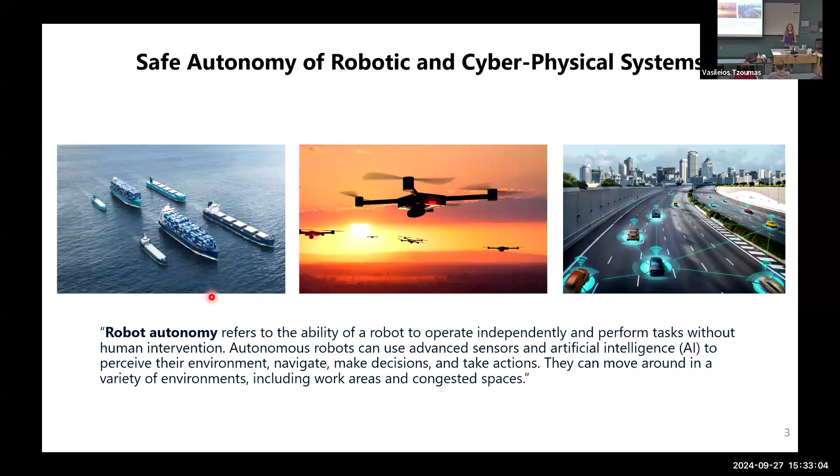Our work aims to enable autonomy for robotic and cyber-physical systems. That means we would like autonomous agents like robots to operate independently in their environment, make autonomous decisions, and act and interact with their environment without the supervision or intervention of humans.

We would particularly like to do that in challenging environments—environments that are uncertain or unknown, like when we use robots to explore other planets, environments that are dynamic and dangerous, areas we would not like humans to go close to, or environments that are congested in urban and suburban areas.

So in order to enable this vision, I would like to argue that this autonomy architecture is in fact a feedback loop—a very big feedback loop. And why am I saying that? Consider that you have your robot, typically the plant that we think about in controls, and this robot is operating in an environment.

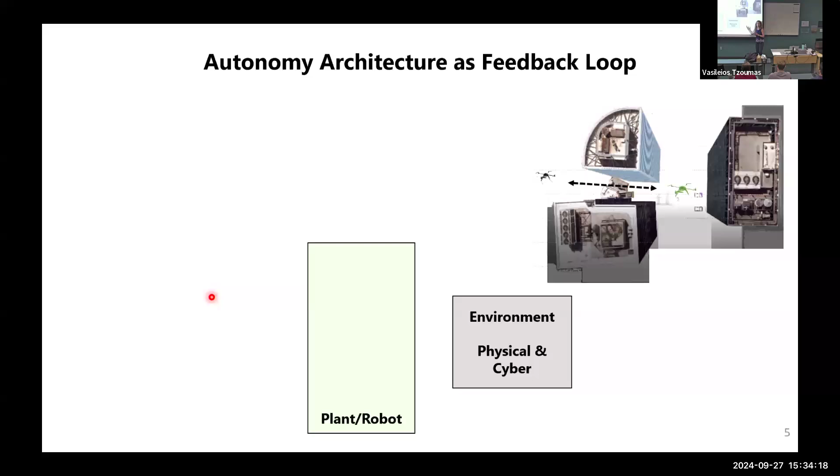This environment is in principle cyber-physical, in the sense that it has physical entities—physical obstacles, other robots, humans—that your robot needs to avoid and interact with. And it's cyber because it also includes the information that the robot has about the environment, which becomes available to it either through communication with other robots or through sensing, typically onboard the robot with its sensors.

So what you also have on your robot is a control module, an actuation and control module, with which your robot is going to move in the physical space. And what you want is, given some reference, for your robot to use feedback information about its environment through sensors and possibly communication, and design a controller—make a decision on how to move in this environment. So essentially here, I'm just closing the feedback loop that we usually show in our undergraduate controls classes.

If you want to see in a bit more detail what this reference to the robot is going to be, then you will probably consider that there are specifications, requirements, and constraints that describe the mission for your robot. These specifications might affect directly your control design—constraints, for example—but also dictate typically the task.

A different level in your architecture is the tasking—what is the task that you would like your robot to execute? For example, it could be avoid the obstacles, go to a goal location, visit the goal location often, and so on. So the mission specification, at a more abstract level, typically needs to be interpreted into a path that the robot will need to follow through the planning module.

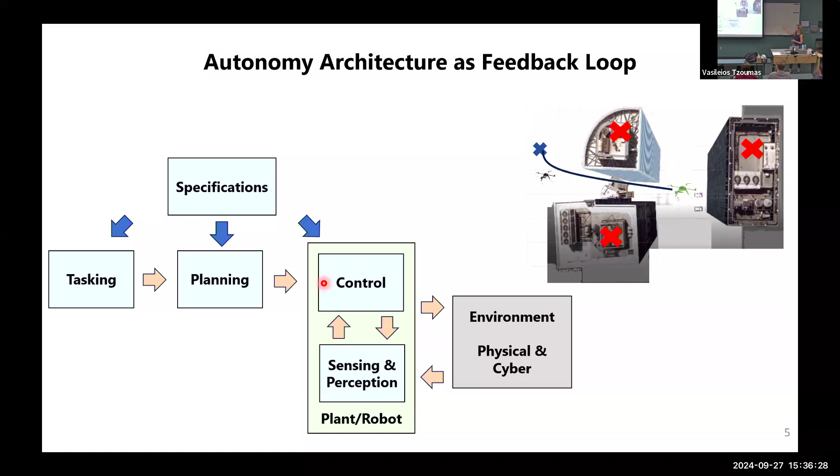And typically that path will become a reference through waypoints, for example, to the controller in order to further close that loop. So this is for a single robot, and typically that would be an architecture for a relatively static environment.

But we talked about environments that are going to be in principle dynamic and uncertain. So adaptation comes into the picture, and you will want to have some form of adapting your model or your control structure that would also possibly include the adaptation of the planner. How you generate the path could be adapted, might need to be adapted. What the task is going to be, if needed, to change throughout your mission, or the specifications that you might want to, that nominally you have for your system.

All this can be part of an architecture for a single robot, and you can only imagine that this architecture becomes even larger scale if you have a multi-robot system.

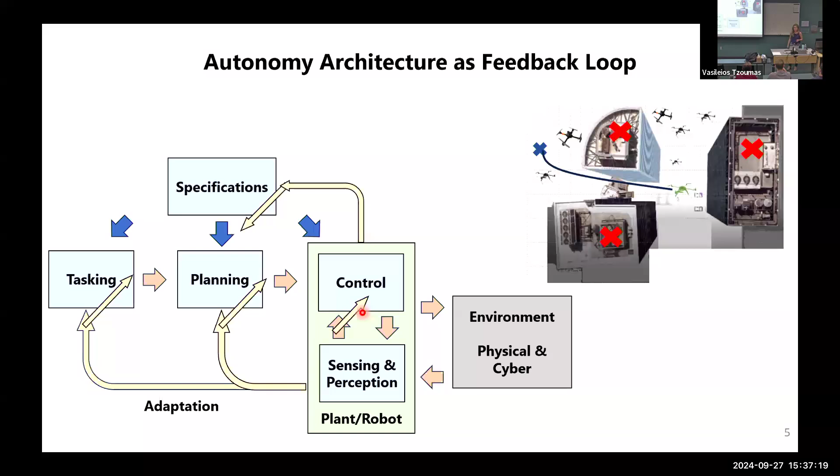So what I am arguing is that for the most part, these problems are very complicated problems, and they have been addressed in the literature typically by taking a decoupled viewpoint. From the perspective of, we typically focus either on how to just design the controller or just the planner, or how to just do the very high level tasking and so on, without maybe paying that much attention to the interconnections between them. There are good reasons why people are doing that, because that simplifies the overall design. But at the same time, that can come at the cost of producing solutions for each of the components of the layers of the architecture that are going to be inconsistent across layers.

On top of that, there are also other real challenges when it comes to how to design such an architecture, from the perspective that typically different parts of the problem might require models of different fidelity. Or they might describe phenomena that evolve along different spatiotemporal scales. And of course, constraints and uncertainty typically span through the entire architecture.

So how can you solve these problems? That's what I would like to discuss today, or at least how you can solve some of these problems, particularly by focusing on some of those interconnections on top of the design of the individual modules. So that brings me to a more technical part of my talk.

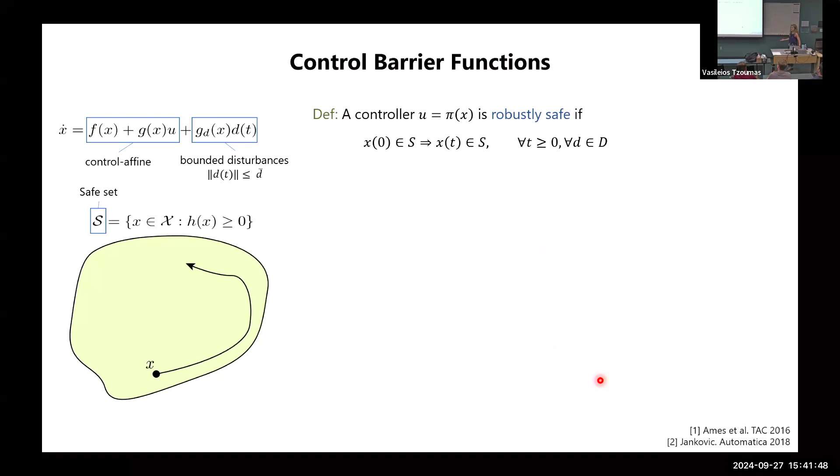But of course, that would be a nominal system. Typically, we have disturbances acting on our dynamics. In that case, you can use robustification arguments to describe a robust version of a control barrier function. The difference here in the condition in the control barrier function definition comes into the picture because you now have the disturbances also acting in the dynamics.

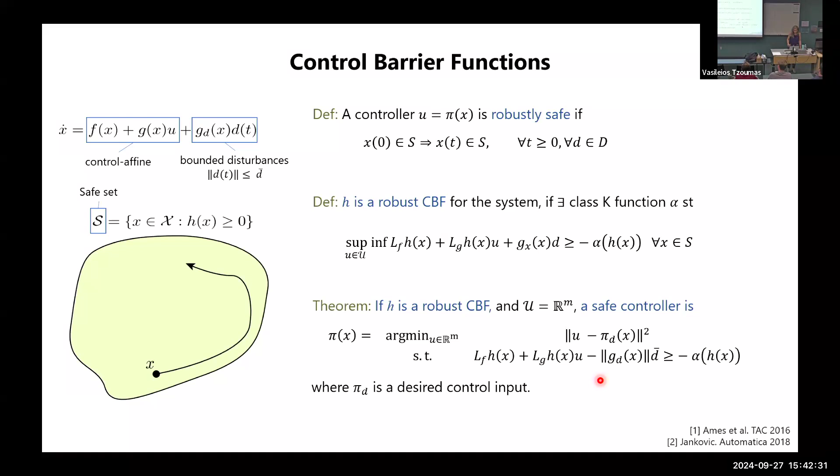And the idea is very similar. If you can find a function such that this condition holds, then this is called a robust control barrier function for your system under disturbances. And you can design a safe controller in that case by forming such a quadratic program subject to your robust control barrier function condition.

Okay, so far, but typically what is happening is that when you want to implement such a closed loop controller, it's very likely that you're not going to have your entire state vector available, but only an output vector y. And that is going to be given by an output model, typically also subject to some disturbances, for example sensor noise.

So then things become a little bit more complicated, and you have to be careful in how you're going to design your controller, in the sense that now what you have available for control would be at best an estimate of your state that you're going to obtain somehow from some observer. And that exact robust CBF is not going to do the trick because it assumes that the state here is perfectly known for safety.

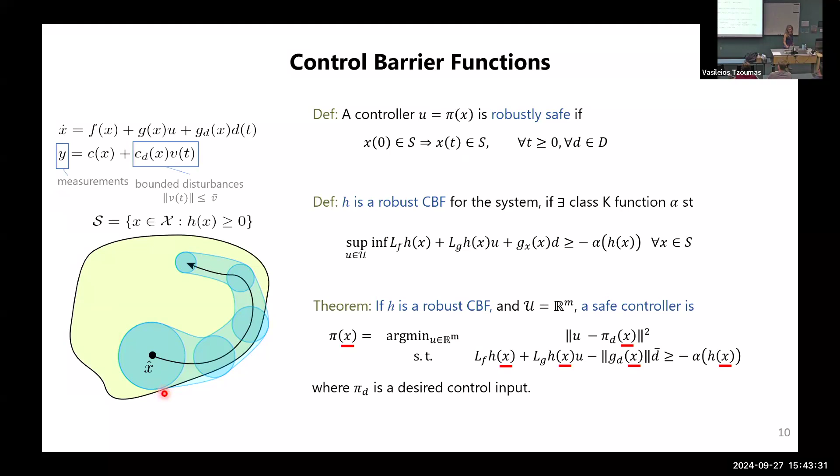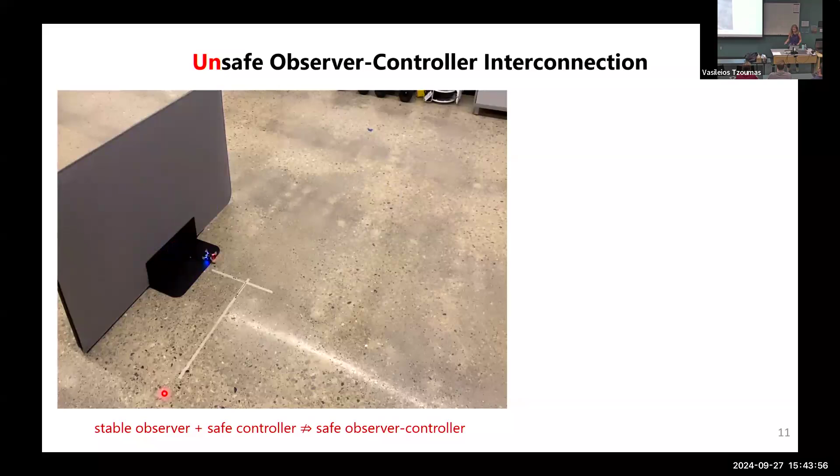Okay, so if you only have an estimate of the state, you have to be careful. In fact, you can see in the hard way that if you design a stable observer, your Kalman filter, your Luenberger observer, depending on your system, to be stable, and you have a CBF that is safe, that you have tuned to be safe, their interconnection is not necessarily safe. Why? Because there's an estimation error that you have to also account for when you're closing the loop.

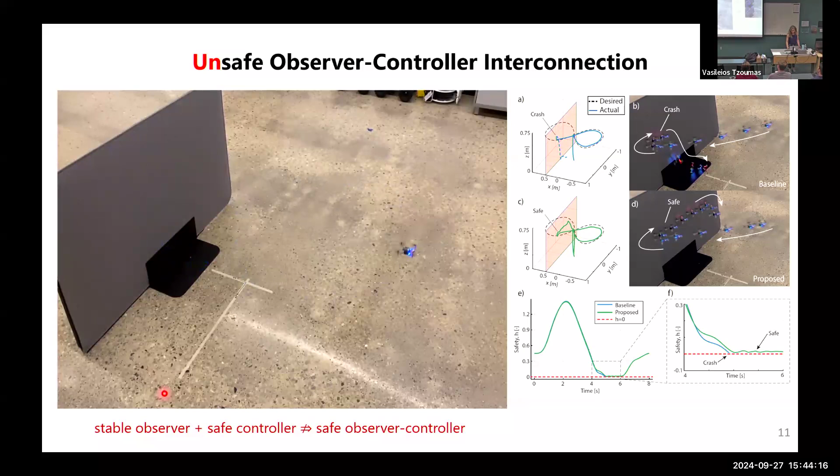So we don't want that case to happen. We would like that case to happen so that the quadrotor is able to stop at the physical obstacle and not crash. Okay, so how do you do that?

We studied this problem a couple of years ago, and the idea is that, to summarize, you have your nonlinear system with output feedback available, and you want to synthesize an observer for your system state and a control input that now depends on your output and the observer, as well as the initial conditions for initial estimates and initial states, such that overall your interconnection is going to be safe, from the perspective that the actual trajectories of the quadrotor will stay within the safe set.

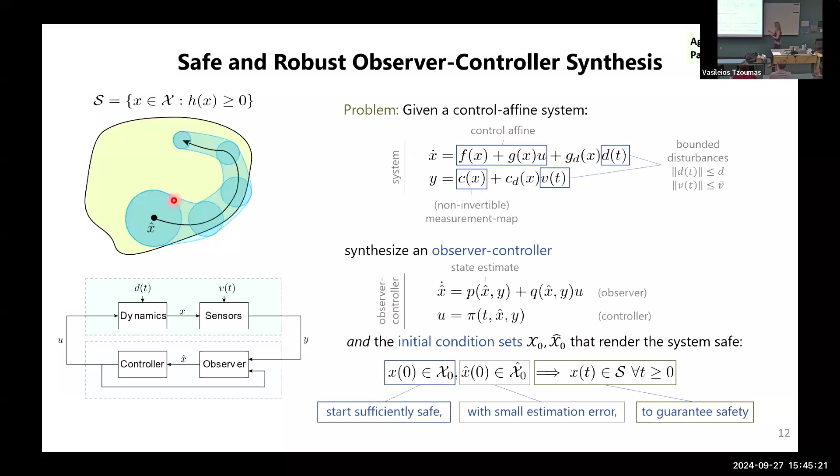And the key, as we're going to see, is that you want to start sufficiently into the interior of your safe set, with a small enough estimation error that you can bound, in order to be able to guarantee safety throughout the trajectories of the system.

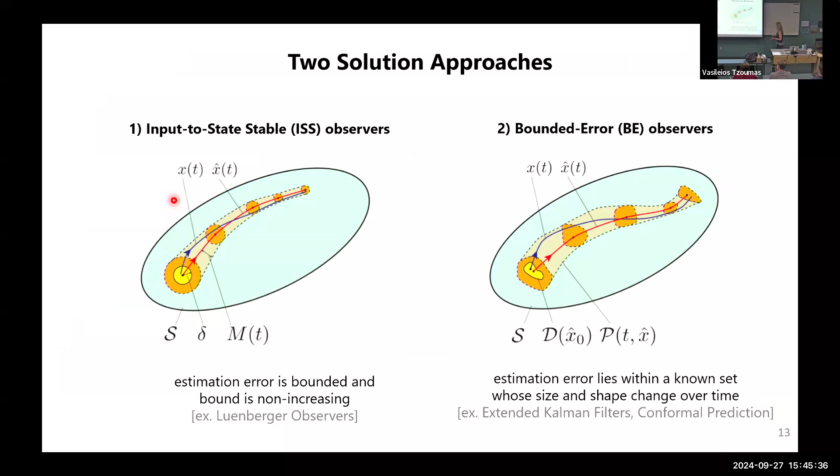So in our paper, we studied two approaches, two different observers essentially, that have the desired properties that we would like to have for this interconnection to work. So I'm going to give some more technical details about the first approach, which assumes that we have an observer taken from the literature.

That observer is input to state stable, meaning that the observation error is guaranteed to satisfy the input to state stability condition, which means that essentially we can bound this error with a non-increasing function M, like this. So given the bound, that's key information.

Because combining it along with the Lipschitz property of your constraint function h, which is the function that describes your safe set, you can show that if this condition holds now for the value of your constraint function for the estimates of your system, so if that bound is met, then that implies also that the true state of your system will lie within the safe set. So your constraints are going to be met.

So essentially, instead of trying to impose this constraint directly, you want to design your observer and your controller such that this constraint here is met. And now you can do that by following the usual mechanism of a control barrier function along the dynamics of your H function, along the estimated trajectories.

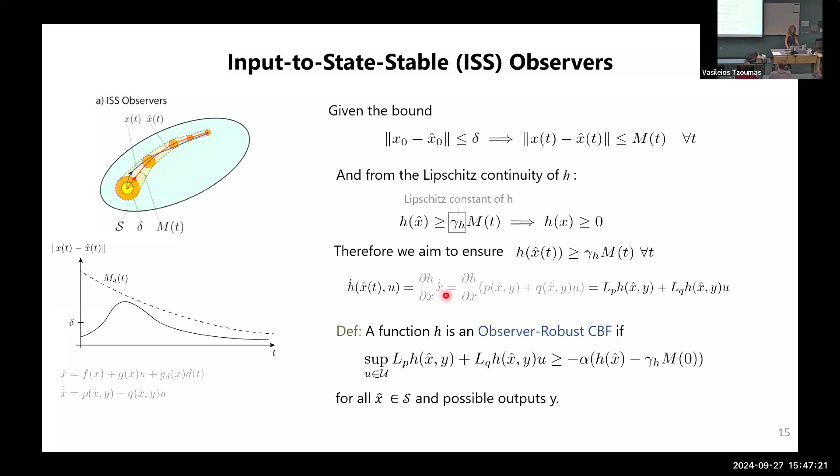I'll spare you the technical details, but essentially you can define what we call an observer robust control barrier function that takes into account the fact that you have to account for an estimation error here.

You can write the result in a theorem that helps specify the set of initial conditions and control inputs such that this condition is met, out of the analysis from the derivative of your H function. Intuitively, compared to your earlier robust control barrier functions with perfect state, you're making your condition more conservative because you have an estimation error to account for. But assuming you have a stable estimator, this error becomes smaller because it tends to zero.

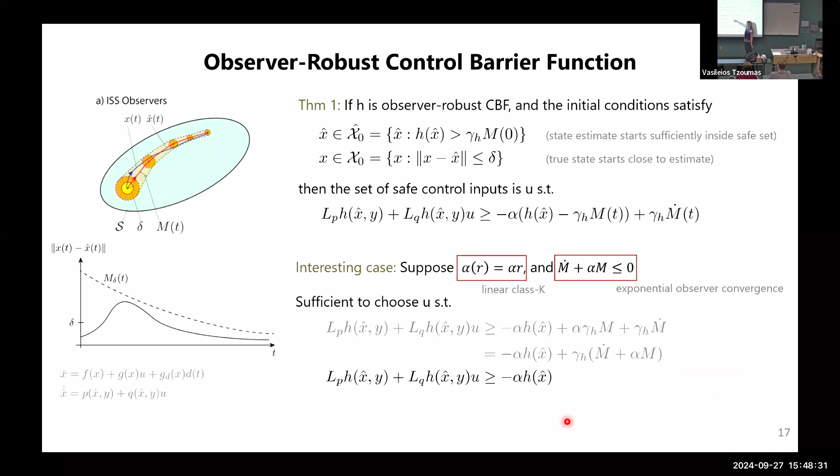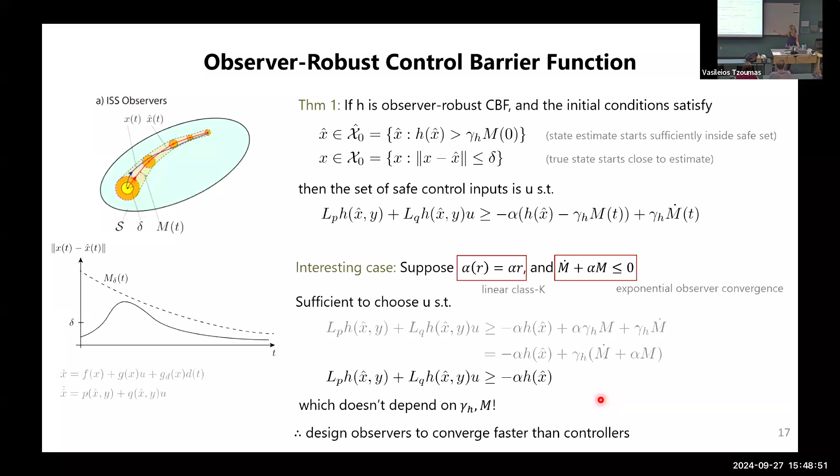So eventually, the more accurate the estimation, the less conservative you become over time. If you write down the specific case with a linear class K function and exponential observer convergence, you end up with essentially the standard CBF condition, which intuitively tells us, as we know for stability, that you want to design your observer to converge faster than your controller for safety. If that's met, your design can be even easier.

Some simulation results justify the case studies I was showing earlier. If you have a safe controller but without accounting for the estimation error, collisions can happen, which is not what happens with the approaches we have in the paper.

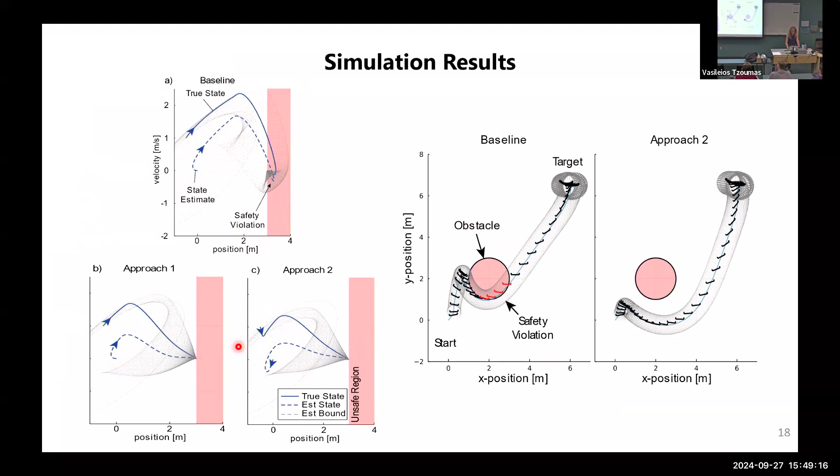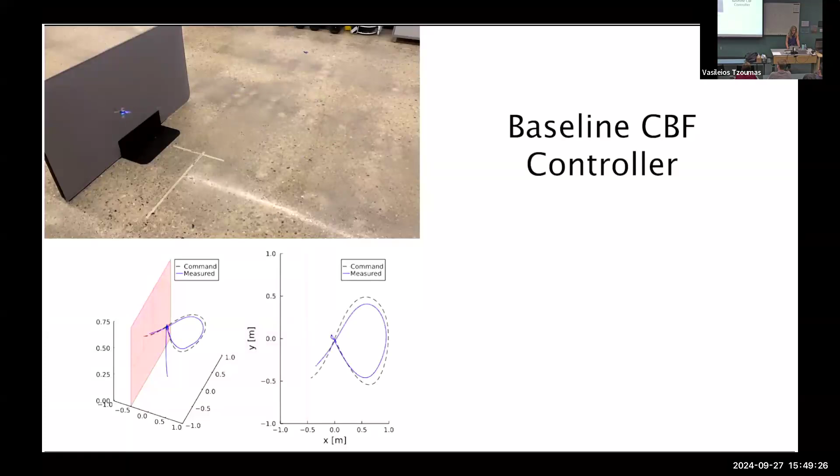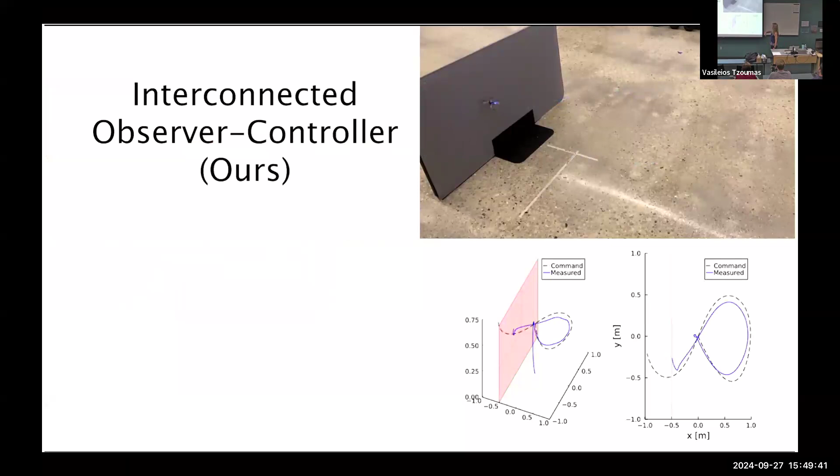To show again the bad case and the good case: crashes happen if you don't take the interconnection safely. But if you apply an observer-controller interconnection as I described in the earlier slides, the robot is able to start decelerating early enough to just go around the wall. That was its nominal trajectory, but it was able to avoid crashing.

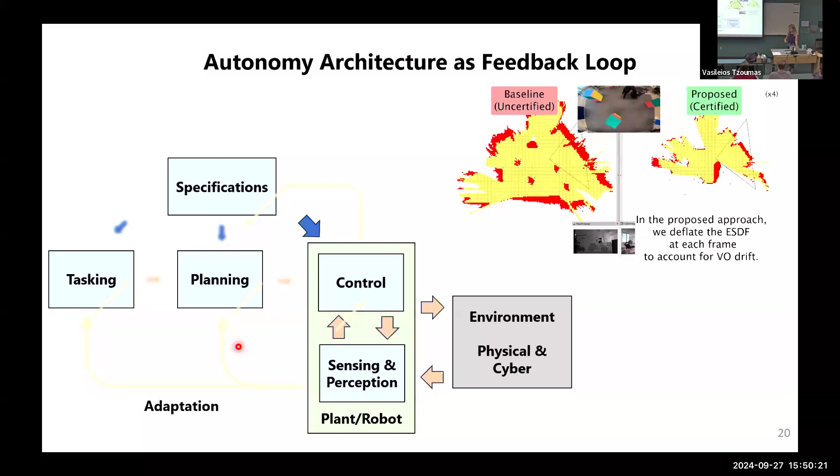So I was talking about perception and sensing here. I just want to acknowledge that perception in the loop is more than just state estimation, and involves the problem of navigation from the perspective of localization and building a local map for the robot to move around obstacles. This is ongoing work that I'm not going to explain in this talk, but I'm happy to discuss it offline if you're interested.

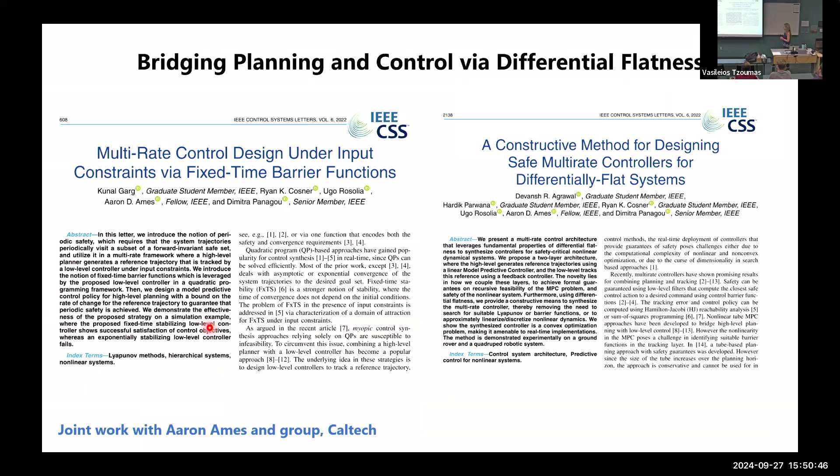So with that, I'd like to focus a bit more on the planning and control interconnections we can define so that the planners we're developing become consistent and safe along with the underlying controllers. I'll refer to some work we've done jointly with Aaron Ames and his group.

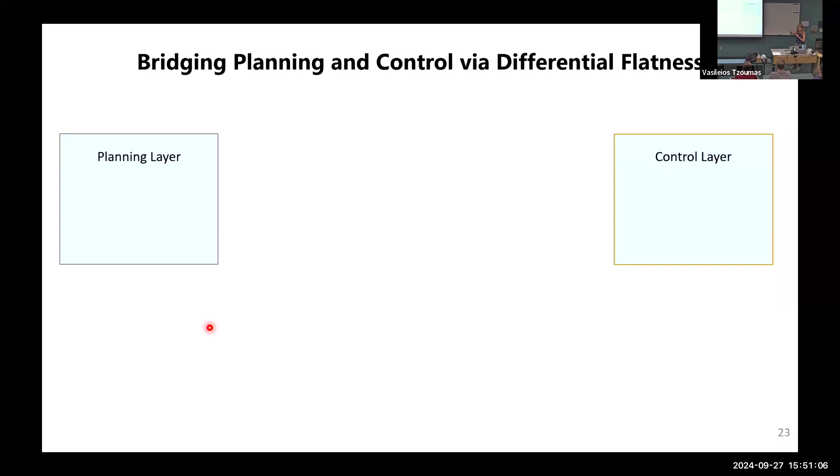I've been thinking about this problem: typically you have a planner that decides the path for the robot, the waypoints to follow, and then a controller that designs the control actions to track this path. Typically you solve your control based on nonlinear dynamics, often with a continuous time representation, but for planning you might need optimization over some objective functional for how the robot moves.

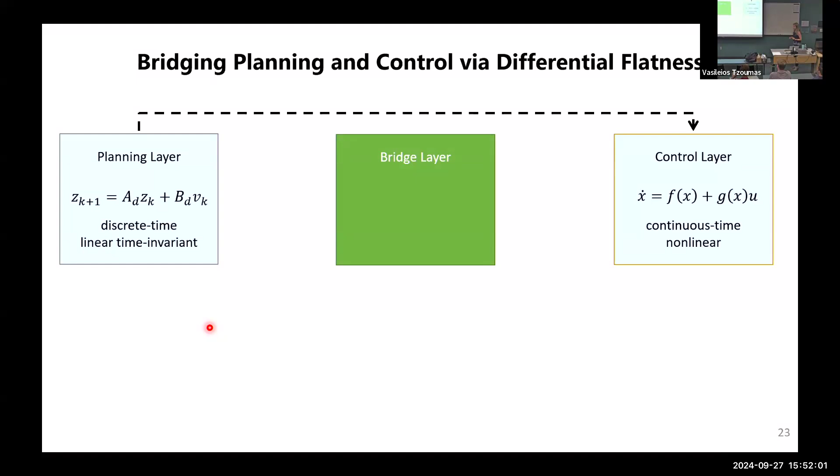So you want to do that with a simpler model, typically a linear model, often at a different time scale, and in a representation that needs discrete time modeling. These two are going to have some mismatch with each other. If you just feed your planner's result into your controller, the plan might not even be followable with your nonlinear dynamics. So you need something in between to bridge the two, or you need to design them carefully.

So what can you do? One idea we investigated was for the class of systems that are differentially flat: we used the transformation of the nonlinear dynamics into a linear flat space, which is exact. If your system satisfies this property, you can have an exact transformation between linear and nonlinear, meaning you can do your control on that flat space because it's linear, making use of the nice properties of linear systems.

If you want a different time scale via discretization for the planning layer, you can do that with zero-order hold discretization and typically not lose anything. So very briefly, what you can do is tracking control on the flat space, and you can guarantee that your system trajectories will stay within a tube around your reference.

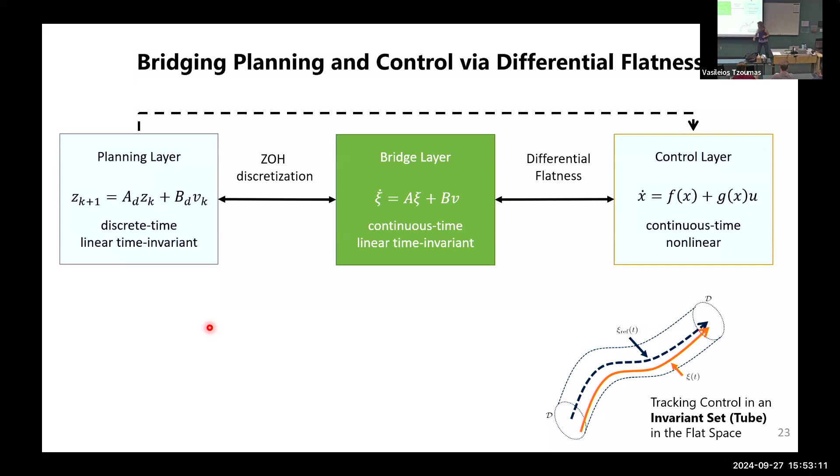You can have exact characterizations of what this tube size D is going to be, and use that D when designing a tightened safe set in your flat space that encodes a smaller version of your safe set. So by how much you need to shrink your safe set is given to you from the properties of the tracking layer. With that, you can have a planner that guarantees safety for the closed loop trajectories, because you force your planner to always plan in the tightened safe set, which gives guarantees that the trajectories will never get into the unsafe set.

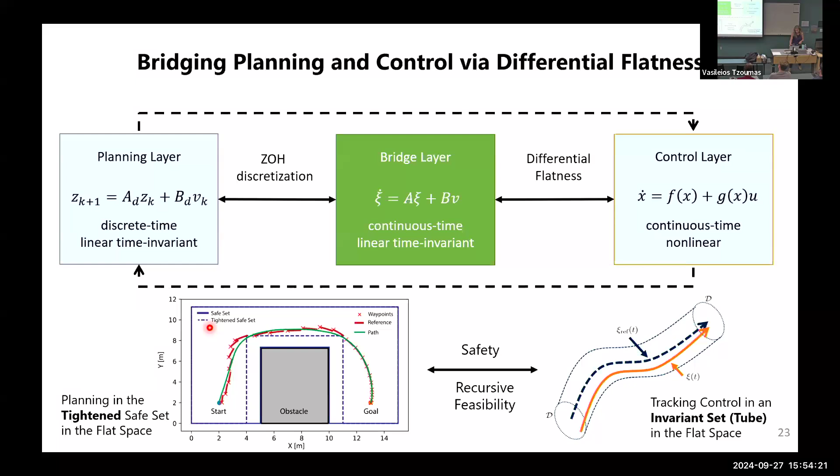If you're interested in further technical details, what's nice is that the way these two work together doesn't guarantee only safety, but also guarantees recursive feasibility for the planner, which is an MPC in this case. I'll save you from the technical details - it's a rather long paper, but if you're interested, that's the title of the paper. We have also implemented that on our robots.

I will skip the video in the interest of time.

So we start seeing ideas on how to bridge the different architectures with different models, but we have used an underlying assumption that there's a differential flatness condition that needs to be met for our systems. That's a standard property that holds for most vehicle type robots and so on, but it might not work for all systems.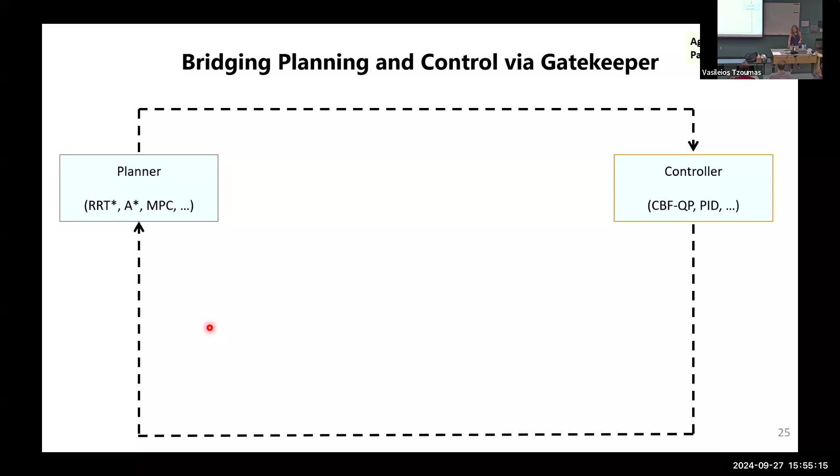So then we kept thinking about this problem, and ideally what you want to do is really have your favorite controller and your favorite planner and have something that makes them work together safely in between, without you caring that much about the choice of the individual planner and controller. So maybe you need an additional module in between, which we call the gatekeeper. Actually, my student called it that - I think it's a nice name.

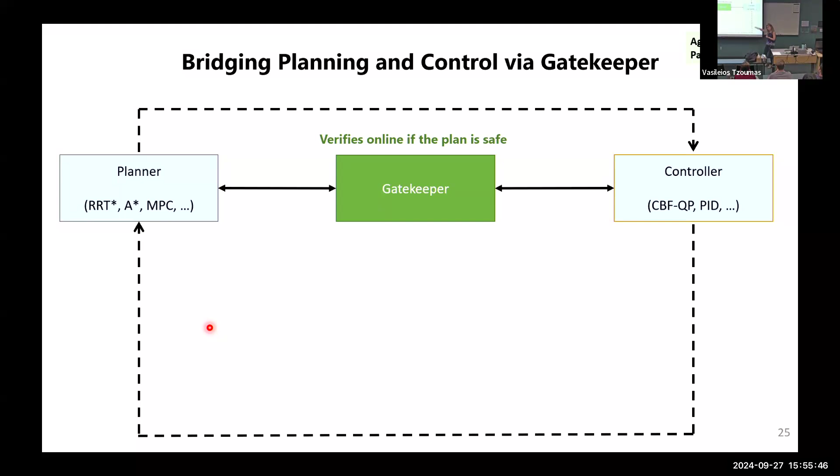Because you want to verify online, essentially, if the nominal plan, the nominal trajectory that your planner is giving you, is going to be safe over a finite horizon ahead, so that you can feed it to the controller. And if not, you want to do something that is going to be safe. So what is the principle of the gatekeeper?

The idea is that at some initial time, the knowledge you have about your environment is that part of your state space - maybe that's the known safe set, because that's what you can see is obstacle-free in front of you from your perception system. So what Gatekeeper is doing is forward simulating, propagating the nominal trajectory that the planner gives it for up to some time t, and then it checks with a backup controller whether this trajectory at the end of a finite horizon will go into a safe set, into a subset of the currently known safe set.

If that's the case, it commits the trajectory and sends it to the controller, so the controller will move the robot. Then at the next iteration of the algorithm, you're at a different part of the state space where you have more knowledge about your environment. You do the same idea, and you only send the trajectory to the controller to be executed if you can verify that it can be safe with a backup controller.

If you find a time instance where the trajectory is no longer safe, what you do is revert back to the previous committed trajectory that was safe - assuming, of course, that nothing has changed in the environment in between - and you execute essentially the behavior of the backup controller.

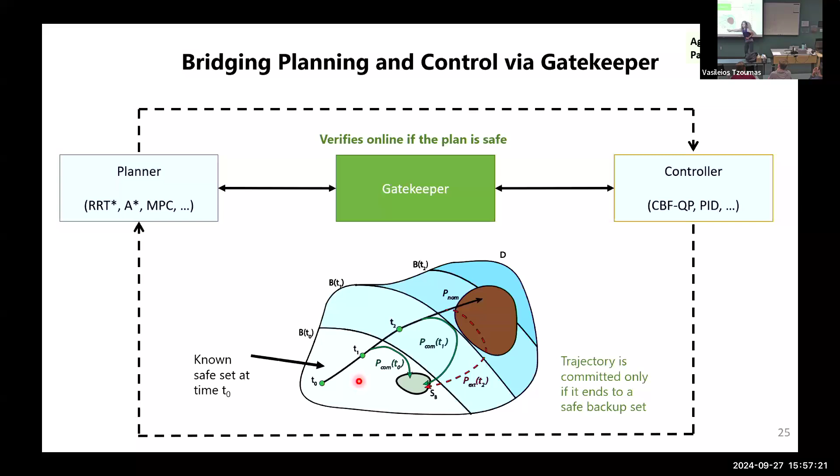So, okay, that would be how the architecture looks like. I'm not going to explain the architecture here, just want to show you that now all the elements that we have for the low-level dynamics - tracking controller, backup controller - are also taken into account here in this architecture in the Gatekeeper.

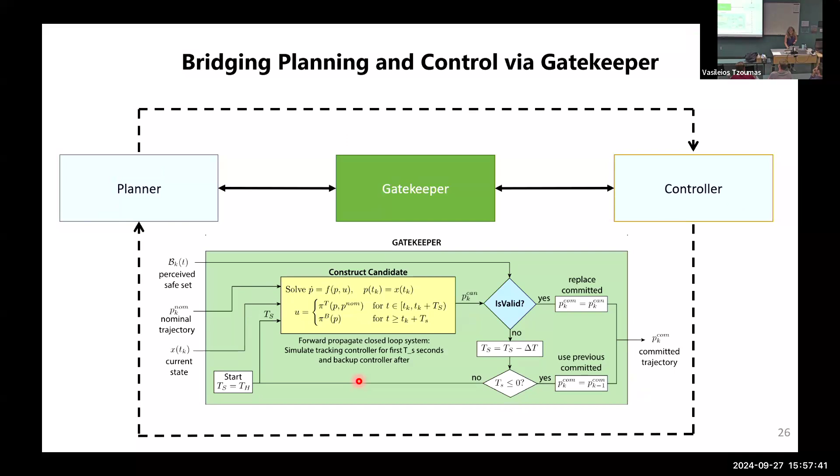And some simulation results about where that can be useful. So this is a case where you have a vehicle that needs to go and track the fire front with information about the upper bound of the fire spread. So you have a dynamic environment, but you have some knowledge about this environment, how it's going to change.

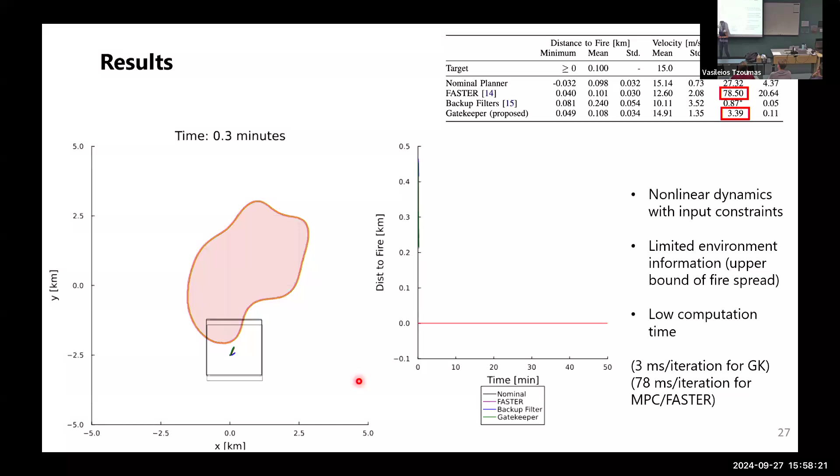What you're seeing here is the behavior of the Gatekeeper, which is the green trajectory, relative to a backup filter, which is a more conservative controller that is safe, relative to an MPC. Look what happened to the MPC: it got trapped in this pocket because it thought it was safe at that time to get into, and didn't have enough finite horizon ahead to see that it's not going to be safe in the future. Gatekeeper didn't get trapped because it knew it couldn't guarantee it would be safe, and there would be a backup action to take it out to safety, so it didn't get trapped.

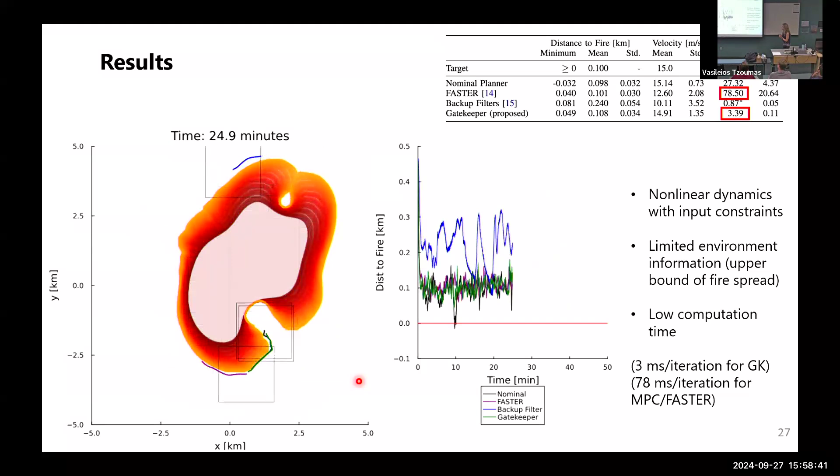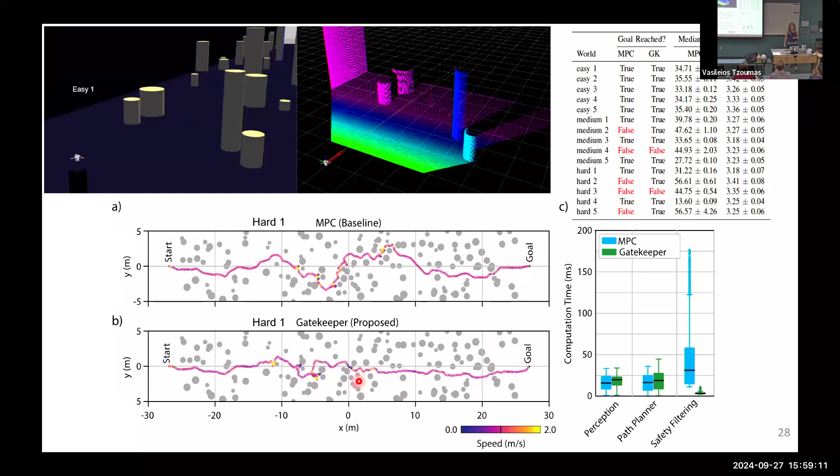You can also do similar motion planning problems with Gatekeeper if you want to go through fast flight, through forest type environments. And in fact it also performs better compared to MPC implementations, from the perspective of being much faster at every iteration, and also having to stop fewer times for backup safety compared to MPC, in terms of deadlocks that were encountered. And in fact, you can also implement that on board actual robots.

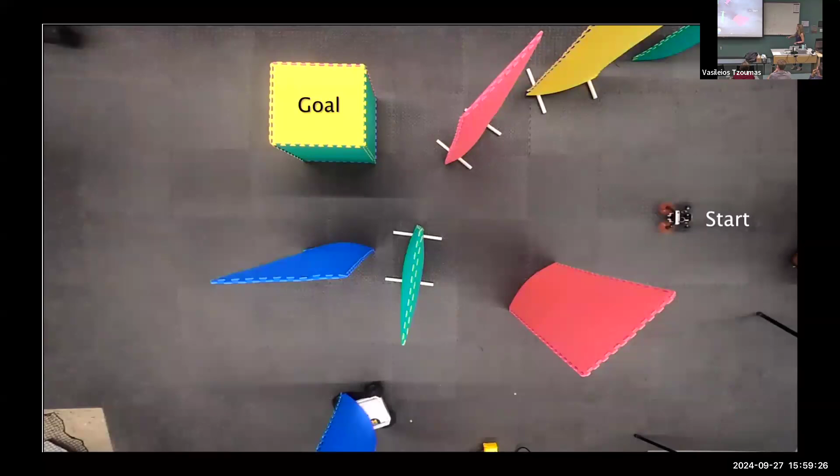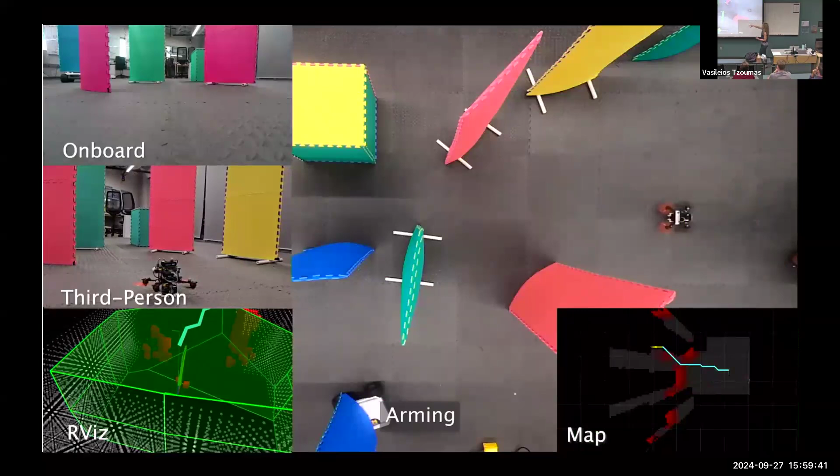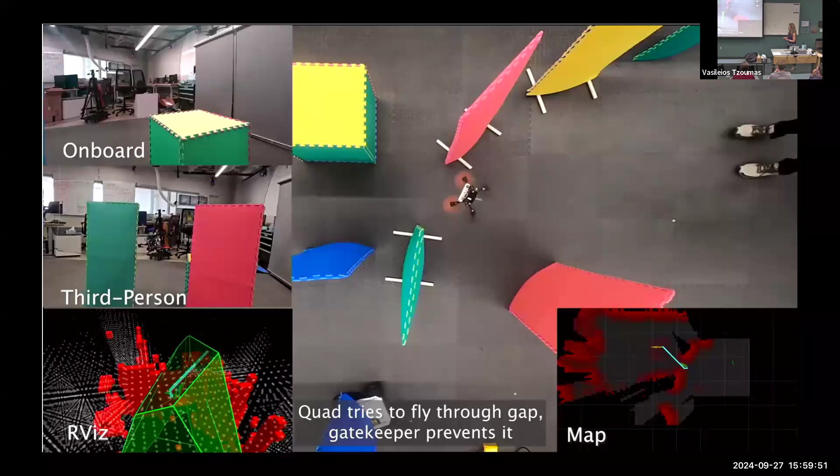So this is an experimental implementation from our lab, where the idea is that the robot needs to go to this goal location. There are a lot of obstacles here, and it doesn't know the obstacles in the environment a priori. It builds the safe flight corridor as it flies. So it can only fly within the part of the flight corridor that can be certified to be safe. The Gatekeeper doesn't allow it to go through here because it does not know that it is safe to go here.

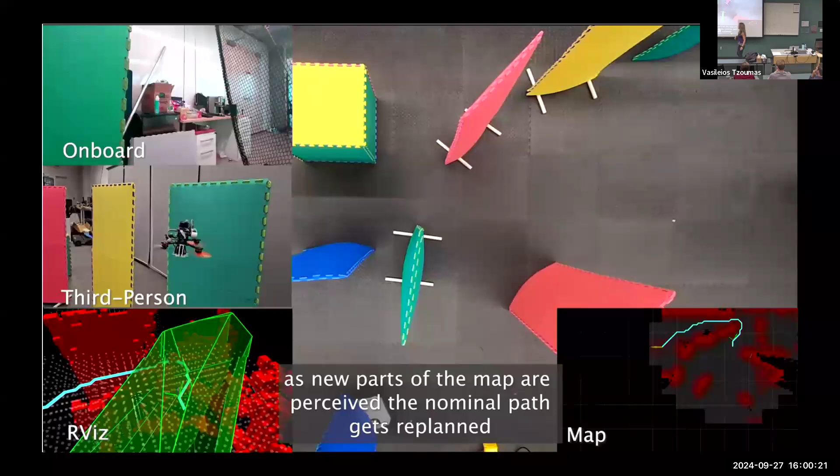We have a naive exploration algorithm that takes the robot around until it finds a safe path. One exists — we have set the environment so that one safe path exists. And eventually what is going to happen is that the Gatekeeper will make the robot go around through the area that is more open and safer, where it can verify that safety will be maintained, and will land the quadrotor safely.

So I have to make that video shorter. So let me move on and go to the next part of the problem.

Essentially you can use properties and structure of the system through differential flatness in order to bridge your planner and controller, to be consistent and have safety guarantees and recursive feasibility guarantees. For Gatekeeper, similarly, under the assumption that you have a backup controller — that's a big assumption, we can discuss that — then you can still have this type of recursive safety and recursive feasibility guarantees.

But as you have seen already, you're probably thinking, okay, in this type of problem, how do I even decide where the robot needs to go? It doesn't even have a map of the environment. So how does the robot explore? This is the last part of the architecture I would like to describe here, with tasking being essentially more of an exploration task for us.

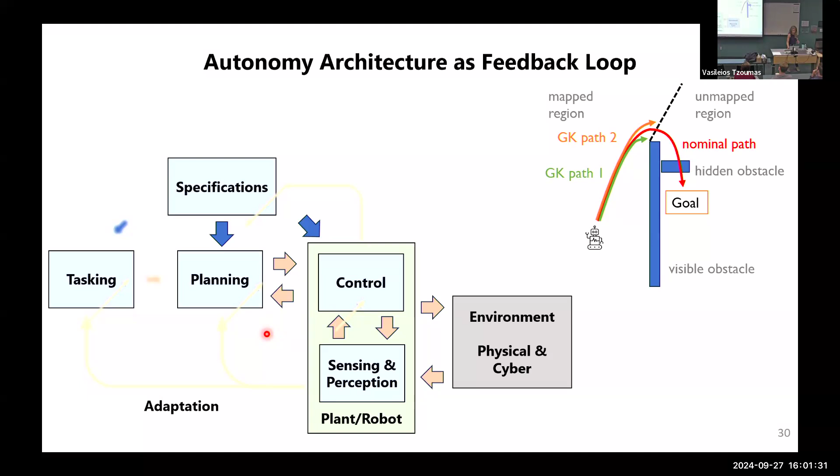In order to make this problem a little bit more abstract, let me remove the obstacle environment assumption at this point, and let's consider that you have a robot that has a limited sensing area, and it wants to go and explore the environment in order to learn something about it. It has a sensing area that is limited, maybe just a circular disk — it doesn't have to be like this, but it cannot sense the entire environment at once.

And there is information that is of interest to this robot. For simplicity, let's assume it is some vector, or maybe some scalar eventually, that corresponds to each point of this environment. Could be that I care to measure temperature or the wind field or something. So we still have our dynamical system, and now we are going to consider that our environment is just this spatio-temporal model. So you have that your m-dot is subject to some Gaussian noise, just for the sake of having a toy example here, and you have your sensing model.

So your measurements are going to be following this model here, where I'm going to also assume some measurement noise.

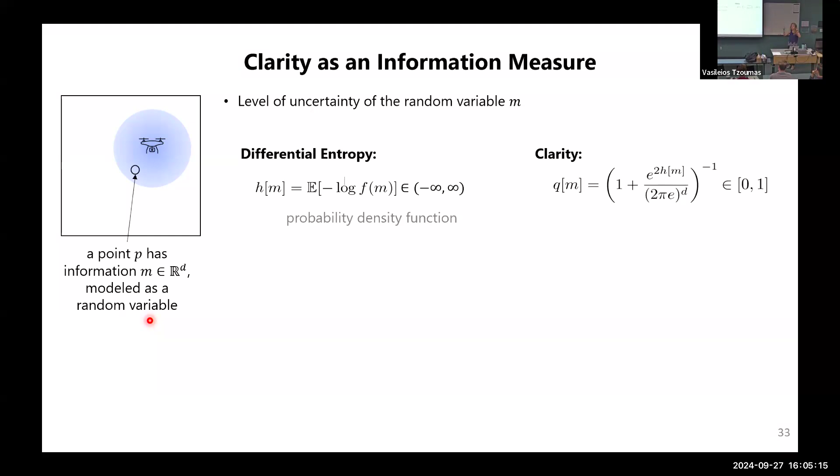Why? Because with this scaling, the output of this function is going to be between 0 and 1. And 0 means that you know nothing about this point of the environment, or you can think of it as infinite covariance at the highest uncertainty. And 1 means I know everything about this point—it would be perfect knowledge in the noise-free, ideal setting.

So then, if you see what is the problem that we want to solve, it's that I have a dynamical system over which I want to collect measurements of this guy here, M. I'm going to just consider it a scalar for simplicity for now, but that holds also for the d-dimensional case. And you also have a sensing model, the one that I used before.

So the first thing that we used in order to estimate this M, based on the structure of the system, was a Kalman filter to assimilate the measurements. And then the estimate of your M hat is going to be a Gaussian distribution with mean and covariance given out of these expressions here, which, if you notice, not surprisingly, depend on how you sense, what is the uncertainty about your sensing model, what is the current uncertainty that you have about the environment, and so on. It's a Kalman filter.

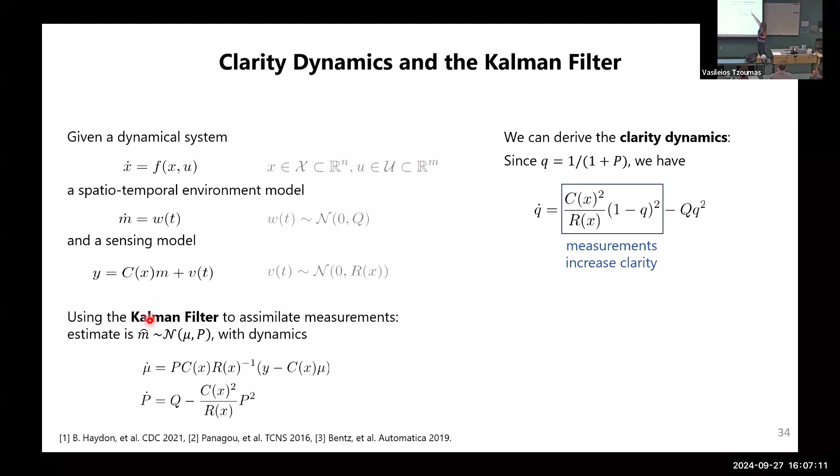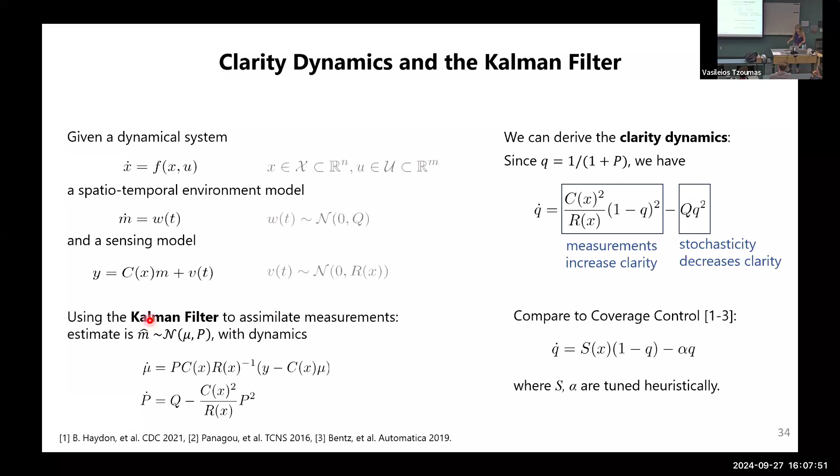An interesting connection that we also made with respect to our earlier work is that this is very, very similar to coverage control structures that people have proposed in the literature, where essentially the sensing function and the decay rate are chosen somewhat heuristically. But here, clarity gives you essentially a principled manner of describing what is the rate of change of information, and hence confidence, for the modeling that you have chosen.

So then what do you do? What can you do with that? We were thinking, could we start thinking of other interesting problems about how to control for information gain? A problem that came to mind was, can we say something if we have a time budget on executing our mission? Because again, constraints and so on—maybe you have a limitation on how much time you have available in order to collect these measurements.

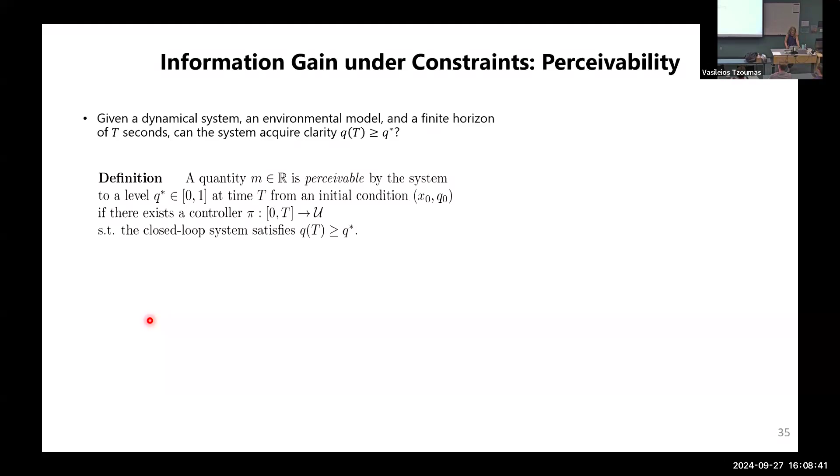And we have like an environment and our dynamical system. Can we say something about how we can acquire a clarity level, a target clarity level, and how to do that?

So the connection that we made there was that, well, essentially you have an augmented system that has your vehicle, your state, your system dynamics, and also has your clarity dynamics. And altogether, you can see it again as a reachability problem, if you think about it.

So you can define, for example, that this quantity M, this model M, the state that you want to estimate, will be perceivable by your given system to a given clarity level, Q star, that you will have to choose at the time t from an initial condition of initial states and initial clarity level, if there exists a controller such that the closed loop system trajectories are going to be so that at the end of the time horizon, you will have reached your desired clarity level.

I'm just formulating essentially a reachability problem over the actual trajectories and the information trajectories of my problem.

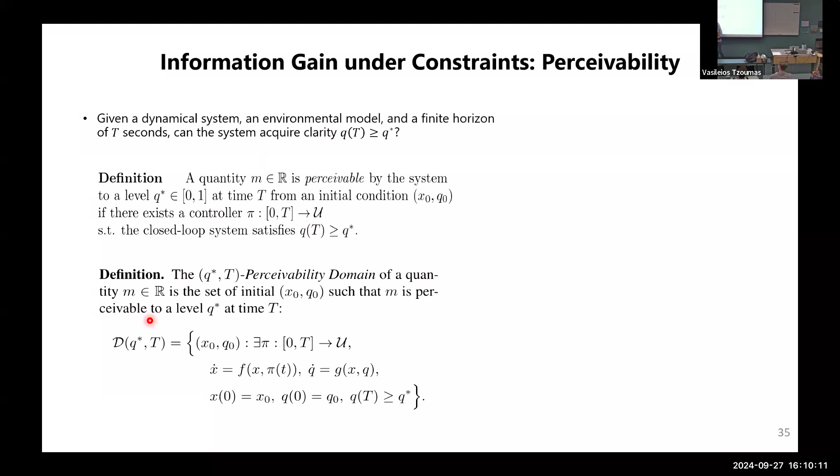And again, inspired by reachability, you can define even the perceivability domain as the set of initial conditions of states and initial clarity from which you're going to be able to perceive, using that clarity dynamics model, your quantity M to a desired clarity level within a finite horizon time t.

So essentially, we were thinking of it as putting together reachability and observability and information gathering over the trajectories.

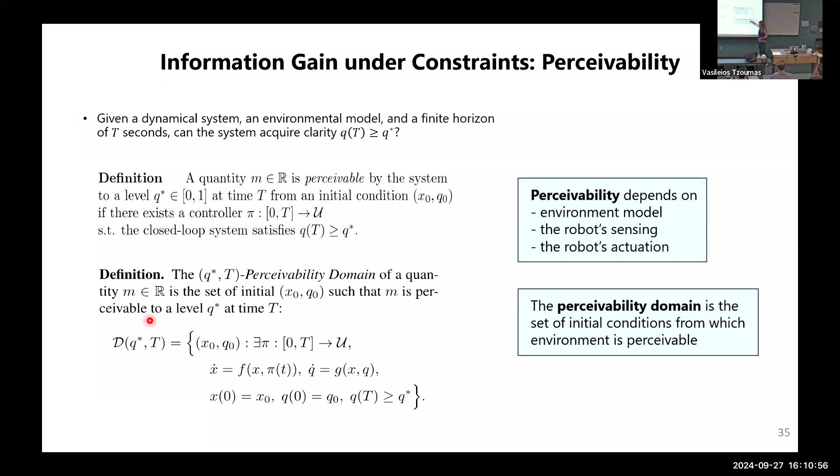And with this formulation of the augmented system, you can have a characterization of how can I reach the desired clarity? So how can I reduce the uncertainty to the extent that I will set, while taking into account the model, the sensing of my agent, of my robot, the dynamics, the constraints of my robot, and so on.

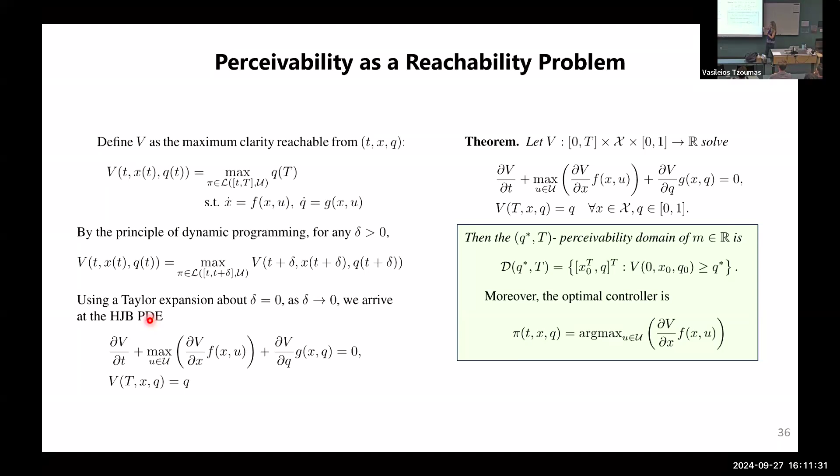And in effect, again, it's a reachability problem. You can write down what is going to be the value function of the corresponding optimal control problem. You can do your dynamic programming exercise here, and then you can characterize what is the perceivability domain as a given level set of the value function of this problem. And you're also going to be able to have an optimal controller that will satisfy your objective.

Of course, that comes with a cost: you will have this optimal controller only if you are able to compute it for a high-dimensional system. So you are limited by reachability on what type of systems you can address.

So just as a toy academic example, we did some computations of perceivable sets for our clarity dynamics, meaning the information gathering with a Kalman filter, and single integrator dynamics for a very simplified model for a boat. Consider this to be a sensing, so this is like an ocean environment. This is a drift along this direction.

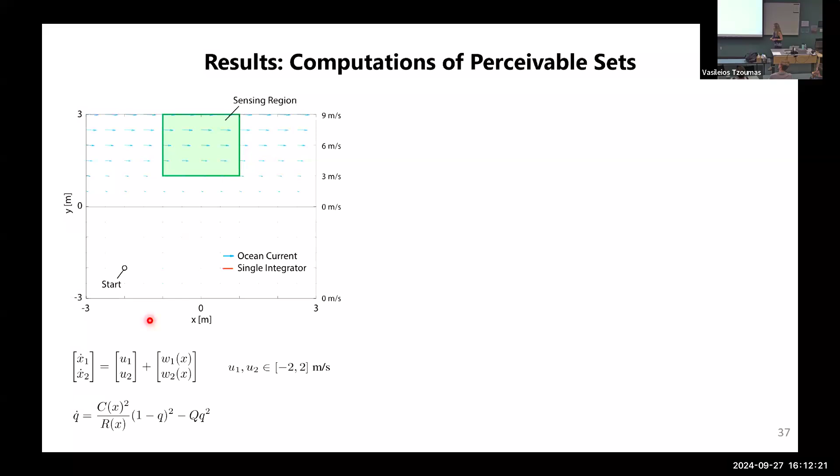This sensing region is where you need to go in order to collect measurements. So we wanted to essentially compute what would be the initial locations of your XY environment, of your states X1 and X2, and what would be the corresponding initial clarity levels by solving this optimal control problem, from which, if you apply the optimal controller that you get out of your perceivability computation, you will have a trajectory that will take you with the desired clarity level to the desired sensing region.

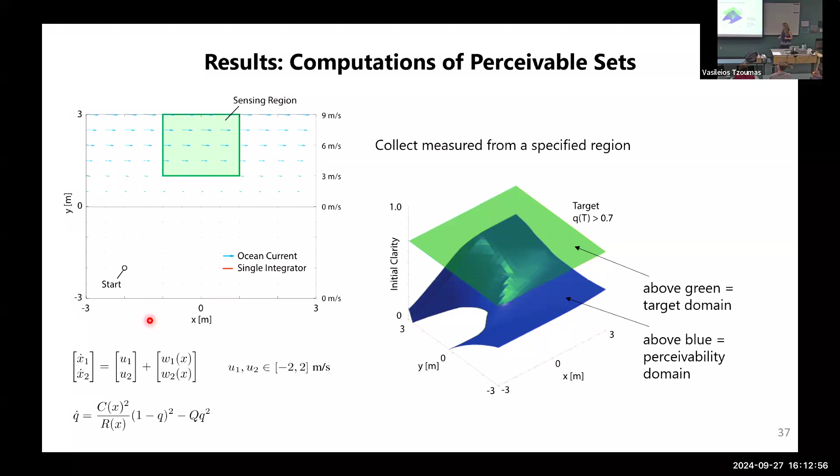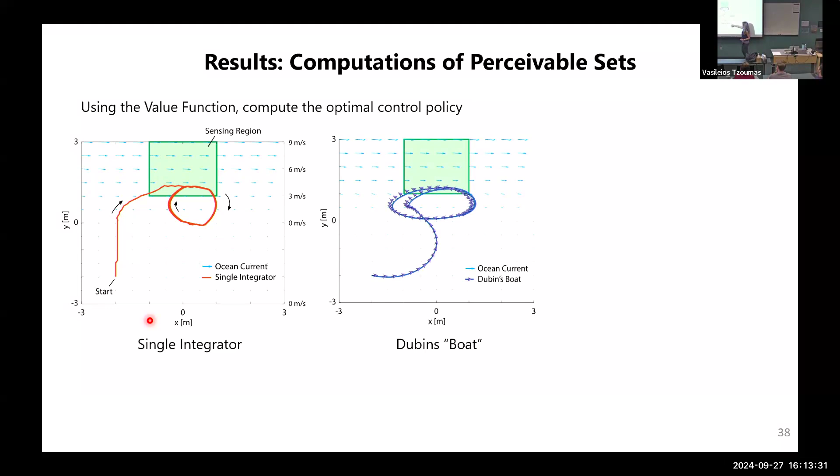And if you want to see that indeed the dynamics matter, as you were expecting, if we use a Dubin's boat, so a constrained vehicle dynamics, then the corresponding trajectory that we get is different, not surprising. And also the clarity levels that are attainable are different, because it's more difficult for the Dubin's boat to do this loop in order to keep collecting the measurements.

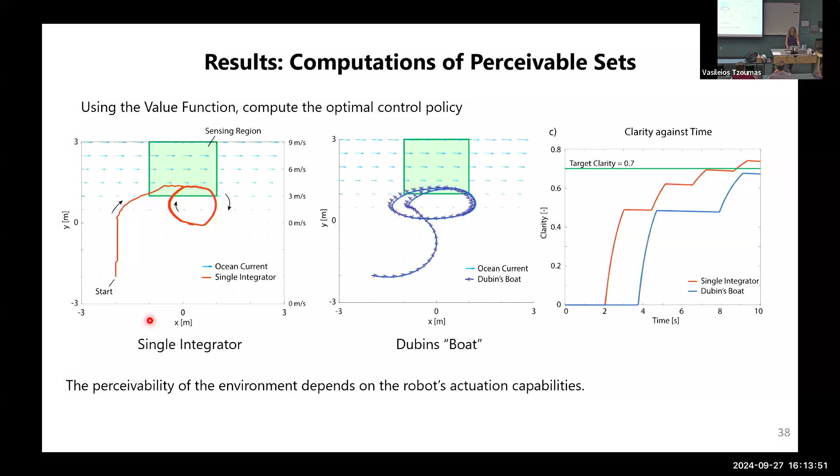Okay, and other things that you might find interesting connections with these concepts is that we have identified connections of clarity and perceivability with ergodic coverage controllers. And in order to be able to circumvent the issue with high-dimensional systems, how are those going to be useful computations and useful controllers?

Well, you can try to relax them with control barrier functions and be able to encode an approximation of the clarity targeting problem with a control barrier function instead of solving for the optimal control problem.

If you are interested in seeing further work on that area, in this CDC it was presented the previous day, we have an extension of these exploration methods to the case where we are using clarity and corresponding planning controllers to learn a model that is modeled as a Gaussian, as a GP, instead of the simplified case study that I showed in more detail in the slides.

I talked about adaptation as well. So we have been working on components that involve how you can adapt the parameters of the model and the control barrier functions so that you can adjust to environmental conditions that are changing.

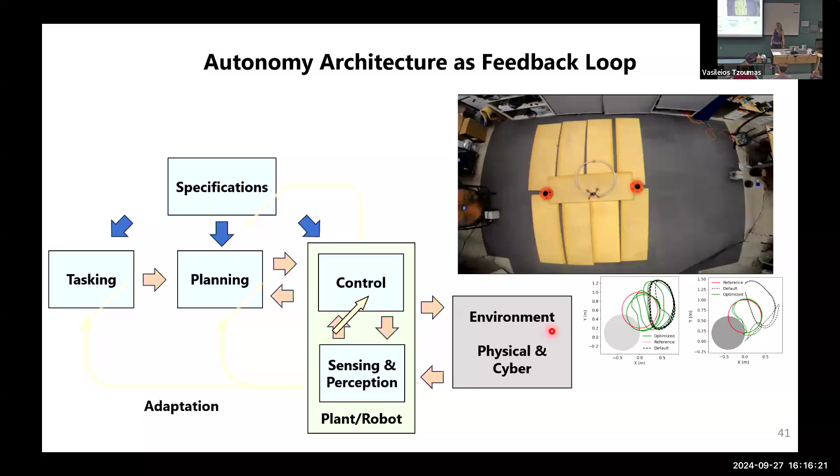Here is just a video of the results of some online adaptation of control barrier functions so that this quadrotor, despite the effect of this wind, learns how to go closer to this obstacle, despite the reference trajectory being way more conservative. So it learns a safer path. Actually, here we do have a violation in the online implementation for technical reasons with online optimization. I'm happy to talk about them offline.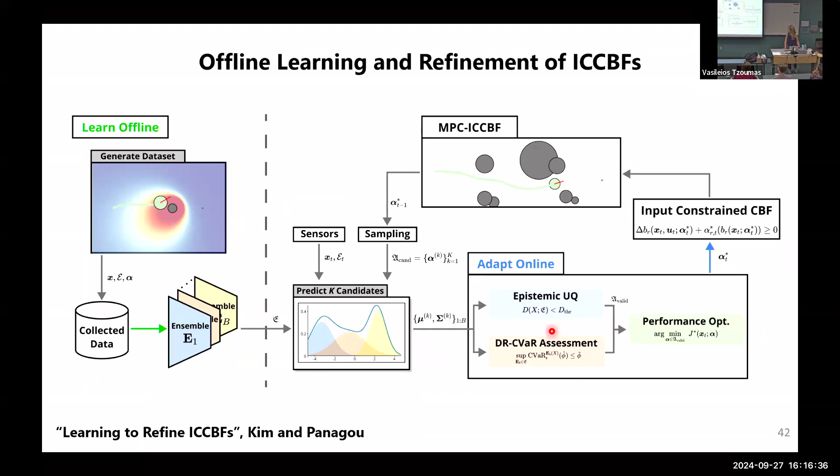But overall, this is ongoing work that shows how you can also start talking about adaptation in these problems. And that is also our take in using offline learning in order to learn those type of control barrier functions and backup controllers that you need also in your gatekeeper. Okay, I was going fast.

Last couple of slides, I would like to acknowledge some of the work of my other students. They have done work on safety critical control with handling a lot of challenges when it comes to constraints and adversarial environments. We recently published a tutorial paper that summarizes some of their work.

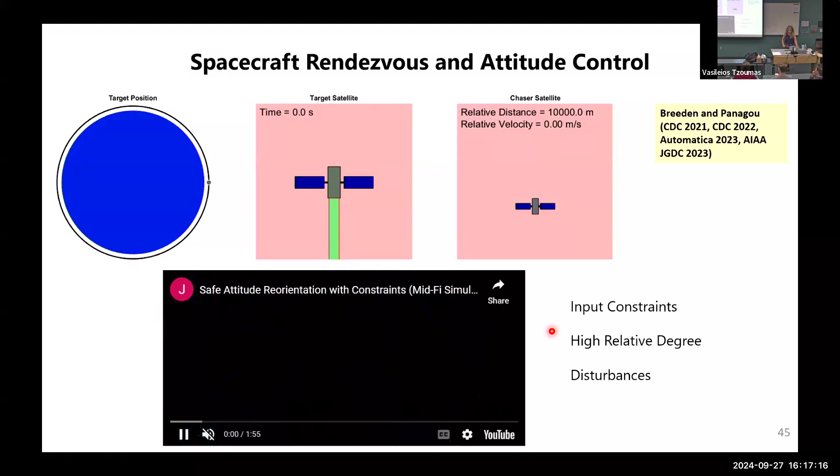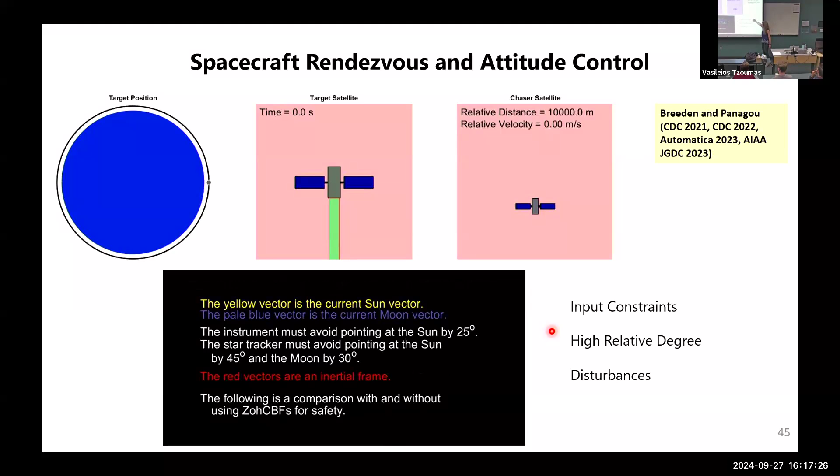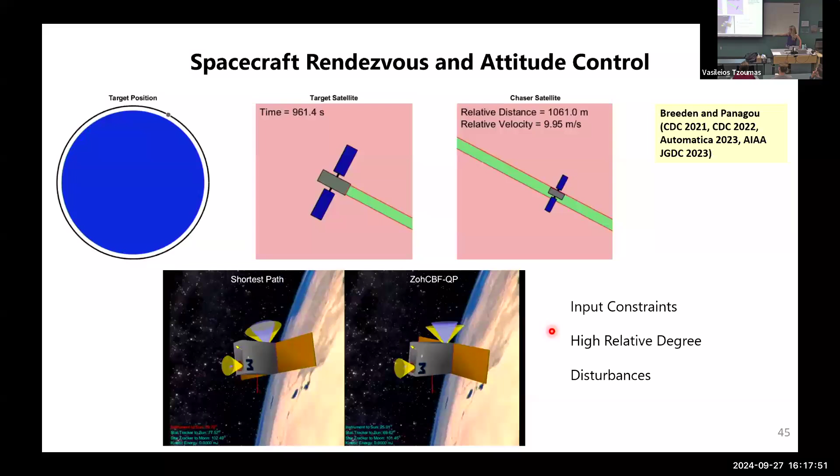Just in terms of simulations and videos, the work of Joseph Breeden, who recently graduated, has addressed a lot of challenges with input constraints, higher relative degree constraints, and disturbances. He has implemented those problems particularly on aerospace problems with constrained attitude control and docking of satellites with tight tolerance constraints and disturbances. So there has also been quite theoretical developments on the theory of control barrier functions that I don't have time to discuss in a single talk.

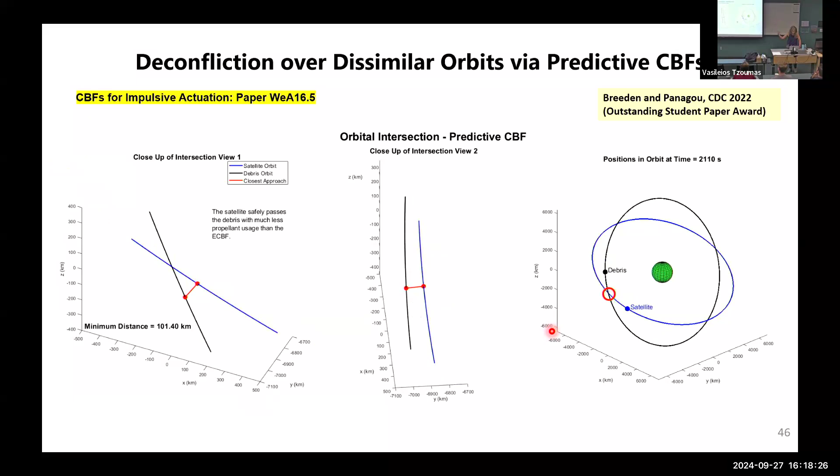Also, he has done work on predictive control barrier functions that he applied to deconfliction on dissimilar orbits. But there are also other applications of that in other types of multi-agent deconfliction. If you're interested in seeing his work on impulsive control barrier functions for impulsive systems, that is going to be presented the next day.

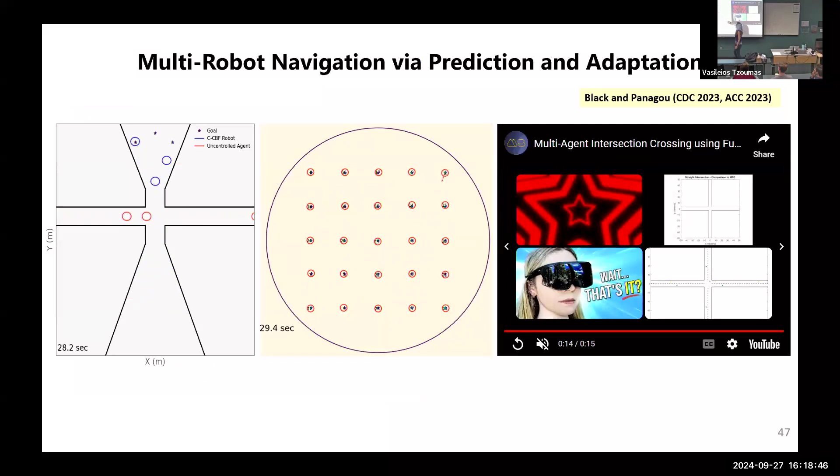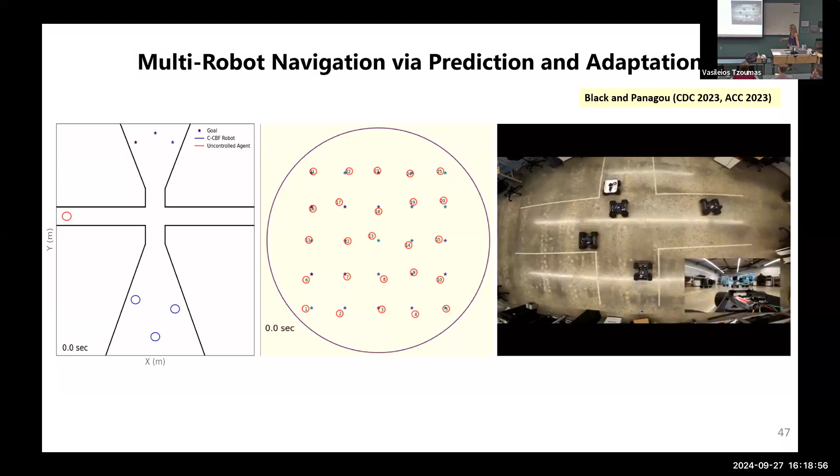In a parallel thread, Mitchell Black was working a lot on multi-agent control barrier functions and how you can use control barrier functions in order to deconflict agents, not just in terms of simulations, but also on experimental implementations in our lab.

I would also like to acknowledge the work of my student Kunal, who has worked a lot on control barrier functions under spatio-temporal constraints. And James Usevitch has worked on control barrier functions and resilience against adversarial attacks.